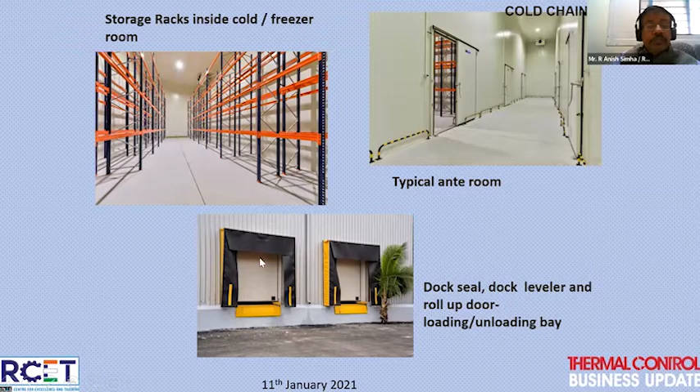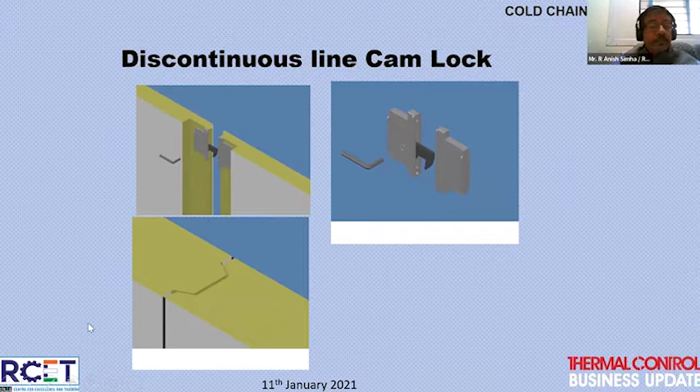And then we have another form, which is the continuous line. You can see in this, the length of the panels is not a constraint. This is the starting point, and where you end, the panels come in, they're kept cool, they're just packed, and then dispatched in this way. A continuous line does not have Camlocks, but has this kind of joining. Depending upon the thickness, you have one or two of these.

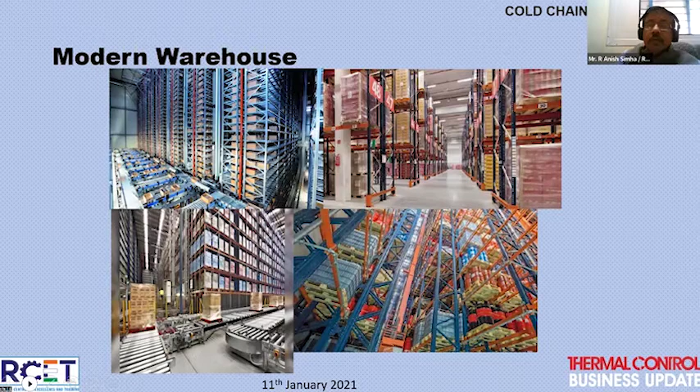So now, what do we foresee in the year 2021? What is our expectation from the industry?

We would like to go green. We, India, our country, have already signed this. We have with refrigeration also, we should make a guideline where for 3,000 metric ton and above, it should be made compulsory to use solar energy.

So pre-coolers, as Mr. Pankaj has mentioned, the cold chain goes from farm to fork, especially for the fruits and vegetable perishable sector. Pre-coolers are part of the pack house, or they have to be near the farm. Then we have the reefer vehicle to transport the pre-cooled material, followed by the pack houses.

These pack houses have grading, sorting, cleaning of fruits and vegetables, or we have a central cold store and processing area, which can also have a pre-cooler. These are all geographically dependent. Finally, whichever is nearer, either the pack house or the central processing area, the product has to undergo the process there.

In the larger processing area, we can also have ripening chambers, pre-coolers, blast chillers, blast freezers, individual quick freezers, plate freezers, cold warehouses, conditioned passages, ante-rooms, and the dock station. Once the produce is pre-cooled, the cold chain has to be maintained, so there is no chance the fruit or vegetable will be exposed to an unconditioned environment.

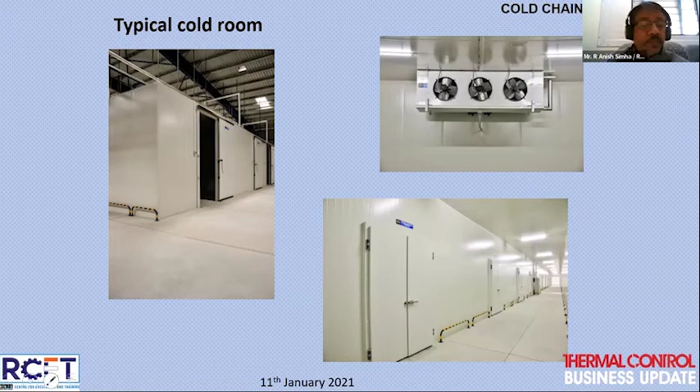You can see there are cold stores, and this is how the indoor unit looks like. These are various cold rooms lined up together for various products. This is another example where you can have a palletized store, and these are the inside pictures.

This is the docking. Since the material comes after it is pre-cooled, it has to remain conditioned. So when loading and unloading, we have dock stations where reefer trucks dock at this position. This can be sealed with air so that outside air does not enter, which would unnecessarily load the refrigeration system.

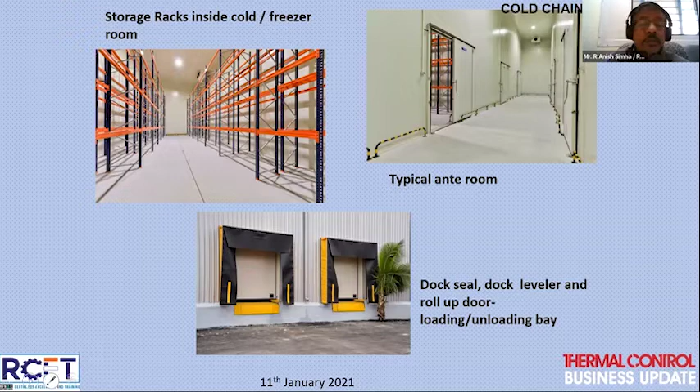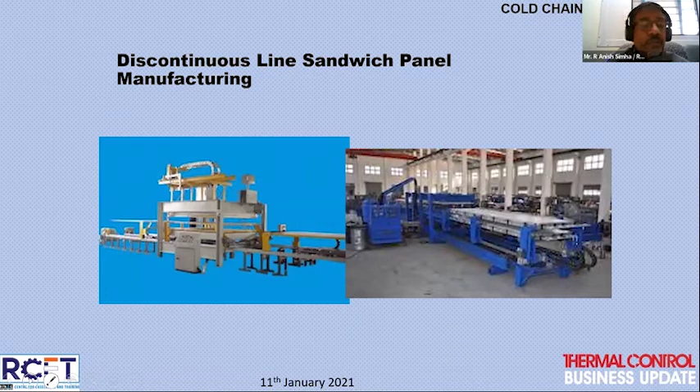These are a few pictures about the manufacturing. We use insulated sandwich panels in the cold store industry, and this is becoming common in many other industries too, especially food processing. There are two types of panels I would like to go through.

One type has Camlocks—you can see a double Camlock or a single Camlock here. This is an insulated panel with one metal surface and another metal surface on the other side. In between is fully insulated material, and these Camlocks are non-conducting—there is no conduction or conducting material that moves from one side to the other.

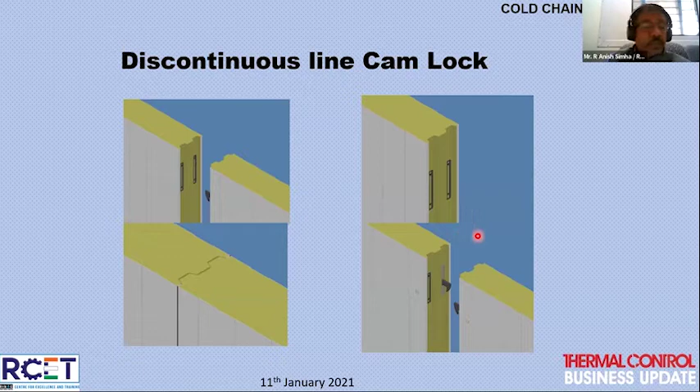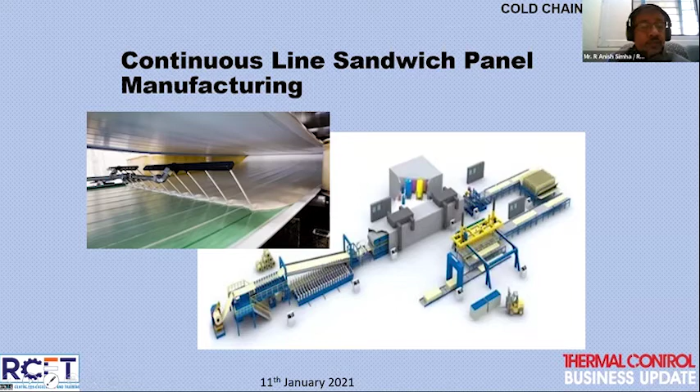Then both sheets are drawn, and everything is automatic—the chemical is poured in this style. As the sheets are drawn around, the panel formation takes place, followed by a cutting machine and so on. It's fully continuous, and the quantities compared to discontinuous manufacturing are tremendous. You can see the production capability of a continuous machine each day.

This style has no Camlocks, but instead has joints. This is how modern cold stores are constructed. You can see the panels being installed, and this is the storage material where the storage racks are placed, and then it is clad with panels.

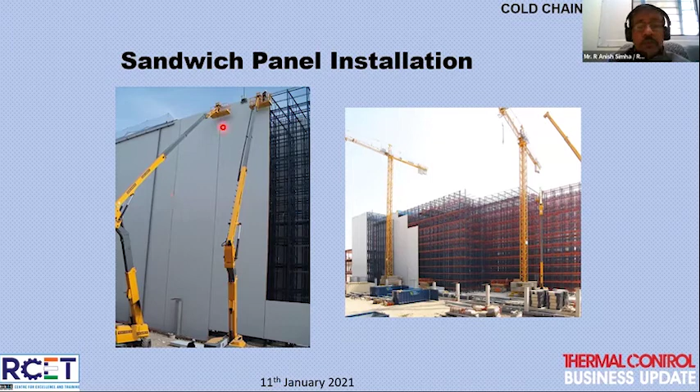So this is how modern cold stores look like, or are being constructed at various stages. You can see these photographs. This is worldwide, the same style, and even in our country we do have many such installations, and we are going to see more such installations coming in the near future.

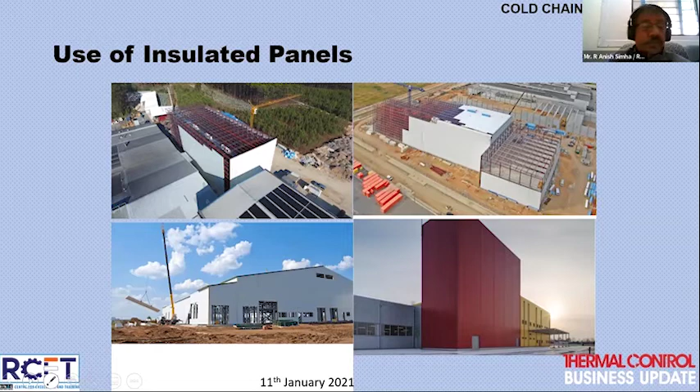Inside also is fully automated. There are conveyors which take in material, so no manhandling. Everything moves on the conveyor, and then there are cranes which lift it up. This can go up to 25, 30, 40 meters tall, and lengthwise up to 100 meters long. So you reduce the width. Overall the space required gets reduced, but you'll require longer, lengthier areas, and this reduces the refrigeration capacity also.

No people, no air required, no lighting. So everything is fully automatic. You can program them. So this is how the worldwide modern cold stores are.

Now coming to the recommendations for the 2022 cold chain. India promotes green refrigeration, so we should make guidelines saying that above 3,000 metric ton, allow only natural refrigerants or refrigerants with very low global warming potential.

And try and use solar energy for all cold stores. I'm not talking about solar refrigeration, but use solar energy and make it mandatory based on capacity, like say 3,000 metric ton and above it should be mandatory. I'm sure now even smaller ones, we have remote cold rooms with solar refrigeration or solar energy used refrigeration system.